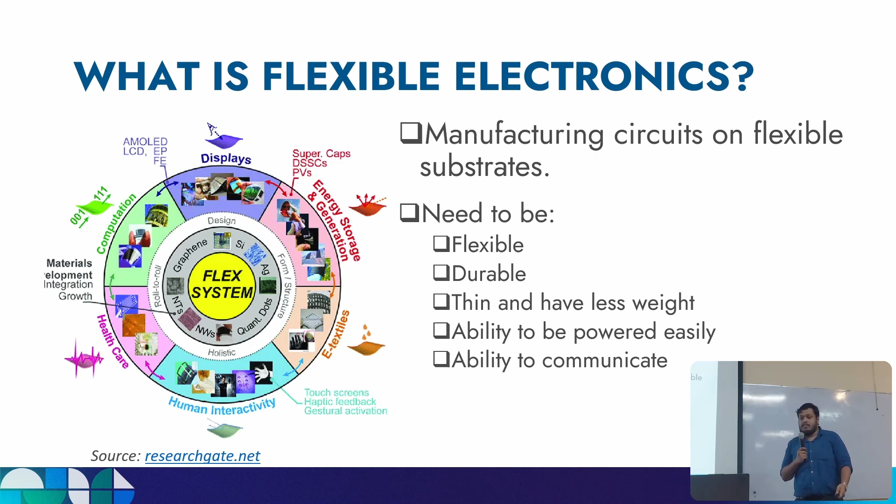But rather than that, they have to have this quality of adding little to no mass to the system. Another thing is the ability to be powered. That means if we are giving any voltages or currents to a flexible circuit, they have to be given in such a way that the circuit does not become too bulky. And also it has to be able to communicate with the users and the environment more efficiently and more easily.

Let's see how manufacturing of these flexible electronic circuits works. There are two main components of a flexible circuit, which are the substrate and the conductive material. The substrate is basically a flexible substrate, mainly created from some kind of polyester or polymer, some hydrocarbon or carbon structure. Polyester means just our day-to-day polyethylene terephthalate and polyimide. Those are the main substrates that we use in our laboratories. And also there are commercially available inks which are used to manufacture these flexible electronic circuits, and we can use technologies such as deposition and printing in order to connect the substrates and the inks together.

There are two main types of fabrication in flexible electronic circuits. One is deposition. Deposition has three main types. One being chemical deposition, which deposits the inks or the conductive material on the flexible substrates using electrolysis or some chemical reaction. And also there is physical deposition, where we use some kind of physical force or spray coating. We just deposit it physically. Spin coating uses the centripetal force to deposit the inks more uniformly, and doctor blading is another very famous method, and also spray coating.

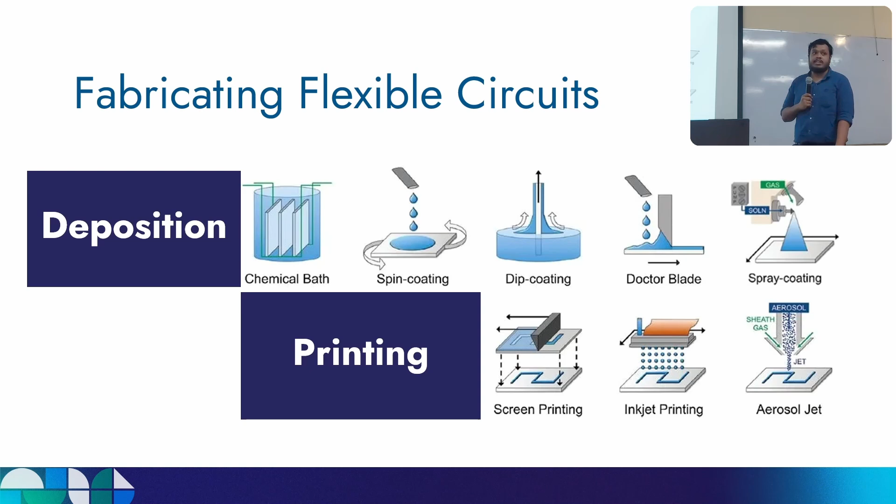After printing those electronic circuits, we have to do a process called sintering. What is sintering? Let's say those metallic inks that we use have organic solvents in them. Those organic solvents are not conductive, therefore they hinder the metal's ability to conduct electric signals. So we have to heat our samples, that means our circuits, locally or using some method below the melting point of the used nanoparticle inks, so that the metallic bonds become stronger. The nanoparticles fuse together, and also the solvents are evaporated. That results in better conductivity and better adhesion between the substrate and the nanoparticle ink.

And also, since the metal is connected together very well, there is less ability to be oxidized. If there are metal oxides, the ability to conduct electricity reduces, the same as if there are organic things. Also, the pores: since we are using nanoparticles, they are in an array like this when printed, so there are small pores between each particle in the neighborhood. When we heat the printed electronics, those pores are reduced because of the better adhesion. The pore reduction helps with reliability, because these pores cause mechanical breakdowns in circuits. We will look at that down the road. Yes, that is mainly my research.

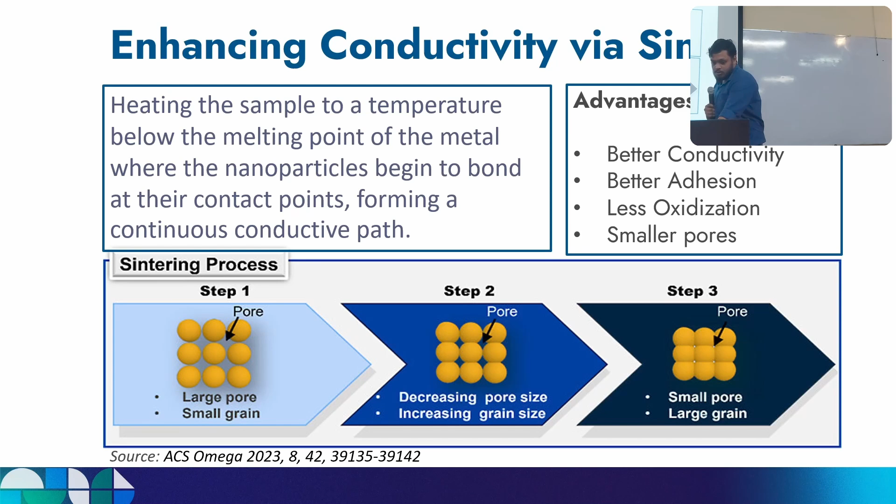There are lots of methods for sintering flexible electronic circuits. The most conventional method is thermal sintering, where we just use a conventional oven, put the substrates and the printed materials inside the oven, and keep the oven on for a few hours under constant temperature. But there are a few drawbacks, because the plastics or polymers that we use as substrates have much lower glass transition temperatures. That leads to deformation if we heat to much higher temperatures.

In order to overcome that drawback, scientists have found localized heating methods such as laser sintering, where we use a laser and focus it on the printed samples, and that causes localized heating, which results in the organic solvents being evaporated more quickly and more efficiently.

So that is a very popular method right now. And another one is electrical sintering, where we give an electrical pulse to a circuit from two ends and let the Joule heating take care of the heating element, and it will cause the solvents to be evaporated. Also, there are a lot of methods like photonic sintering, where we use intense light, and also plasma sintering.

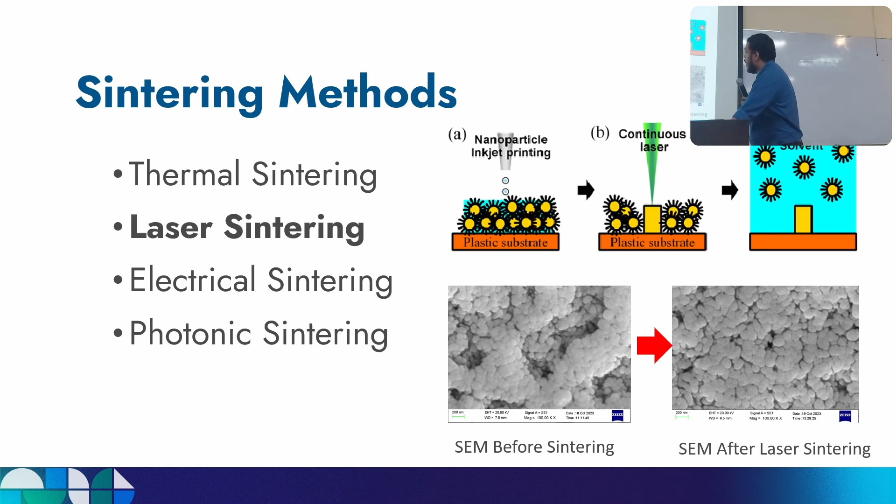And we can see that the bonding is even better. I don't know if it is clear, but the particle size is also a bit larger because of the greater bonding. So after this sintering process, we arrive at a circuit like this, right? So there are many printed parts of a flexible electronic circuit.

It can have maybe a small display. If you are familiar with organic LED or OLED displays, those can be printed. And energy harvesters, that means things like solar cells and antennas where we can gather signals, sensors, and also batteries and capacitors, transistors. In the current age, we can print them, but unfortunately, we still don't have ways to print high performance chips. So they have to be added externally using conductive adhesives.

So yeah. Also, another important thing I would like to point out is these lines. They go from major components to chips, and they connect everything together. Those are called interconnects. Those are the things that I was focusing on during my research, because they are rather thin and brittle. When a flexible electronic circuit goes through bending and complex forces, those are the things that break down first, because they are very brittle.

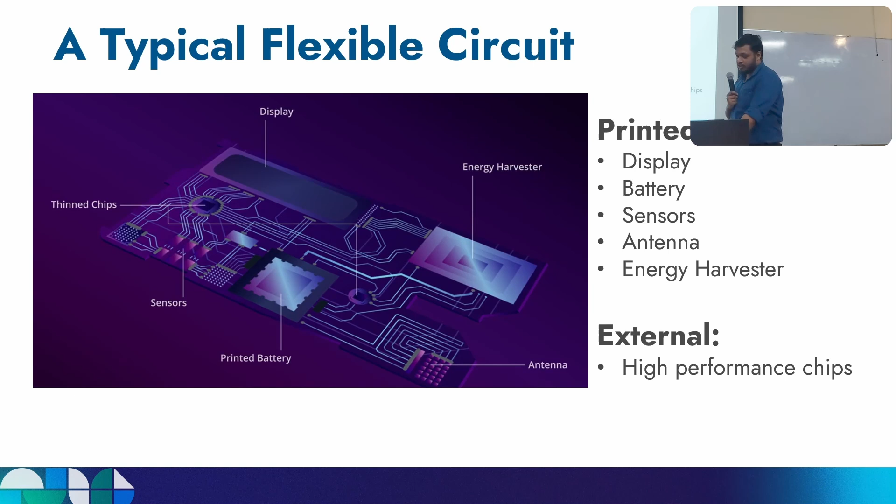So we have to be able to overcome that problem using some methods, right? So that was what I was focusing on. And those flexible circuits have lots of applications right now, and they will grow more in the future. Some of the examples are advanced medical devices which are together with our skin, and also sensors integrated inside our body which can monitor our health, and also smart clothing and e-skin, which is used even in soft robotics.

And also we already have mobile phones that are foldable, right? This is the technology that they are using to create flexible displays. And also we have applications in powering, such as improved solar cells and capacitors, and also sensors. There are numerous sensors; in our lab my colleagues used to develop gas sensors and salinity sensors. So there is lots of research to be done, and that brings us to the pros and cons of flexible electronics.

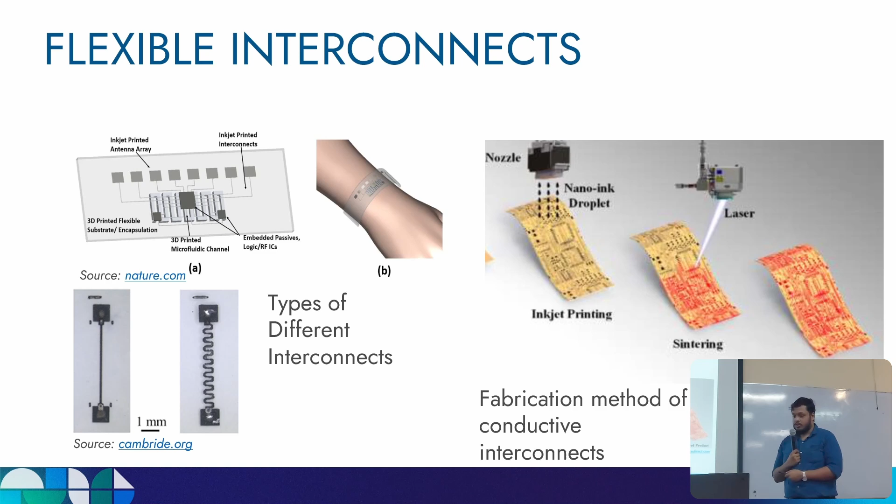As we discussed earlier. So in my research, I used the inkjet printing method to print my interconnects, and then used the laser and focused it on the interconnects to sinter them, and then used those samples for gathering data and drawing conclusions. Okay.

So, as I told you earlier, the interconnects go through very complex processes. It can be twisting and stretching and bending, and over time they go through these processes over and over, and it causes the interconnects to develop cracks on their surfaces. So that means the middle conductive trace cracks from the middle. And those start as very small cracks, micro tears we call them, and they develop further and further until it causes the interconnect to completely break up.

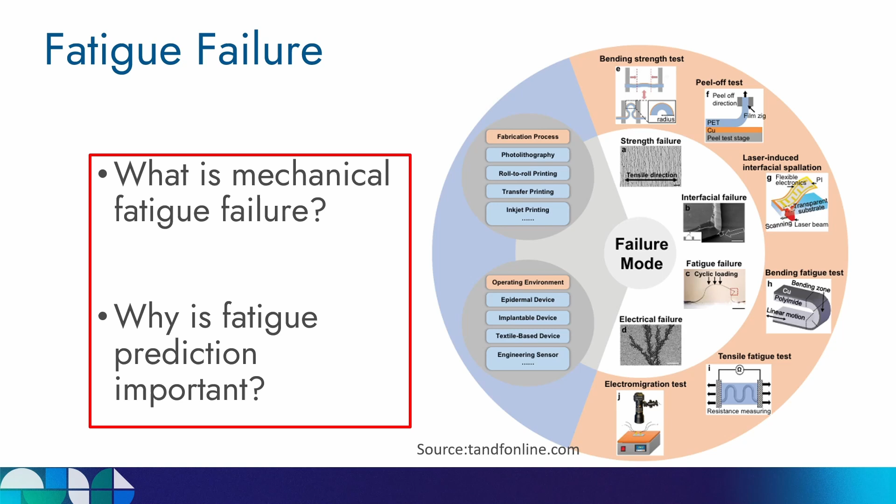So it is important to predict that fatigue or failure point, because if we know that point earlier, then we can take actions to replace or maybe modify and keep it from failing, right? So that was my objective in the research, where I used mainly lasers, and I had to fabricate those interconnects with predetermined, that means predicted, fatigue response.

To explain that a bit further, if we take an interconnect, we can manipulate its sintering parameters basically. So if we are using laser, then we can manipulate laser power, how fast it is sintered, and how many times it is sintered. Using those conditions, I wanted to show that the interconnects can be developed into having a predetermined lifetime. So let's say if we are talking about stretches, I wanted to manipulate those laser parameters and develop an interconnect which had, let's say, 1,000 stretches. So that is what we call fatigue life.

And by developing that method, I wanted to develop a method to monitor the health of interconnects. So it means the quality of interconnects in real time. So those were done using the effects that laser sintering parameters have on the fatigue life. So I had to analyze those.

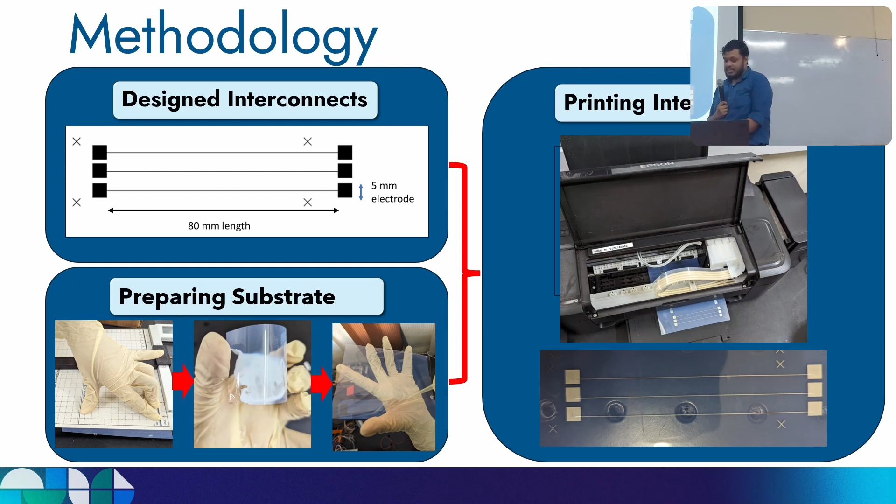So after printing, this was my sintering setup. Here is the laser, which was a Cobolt 0801 laser, and its wavelength was 785 nanometers. That means it is a near infrared or infrared laser, and it was guided through these mirrors and focused on my interconnects here using a convex lens.

So this is a closer look at those interconnects. You can see this is the laser. This here is a CNC machine which was used to scan the interconnect completely under the focused laser beam. This shows how I align my interconnects with the path of the laser, and the signals were given using Universal G-code Sender software to manipulate the CNC.

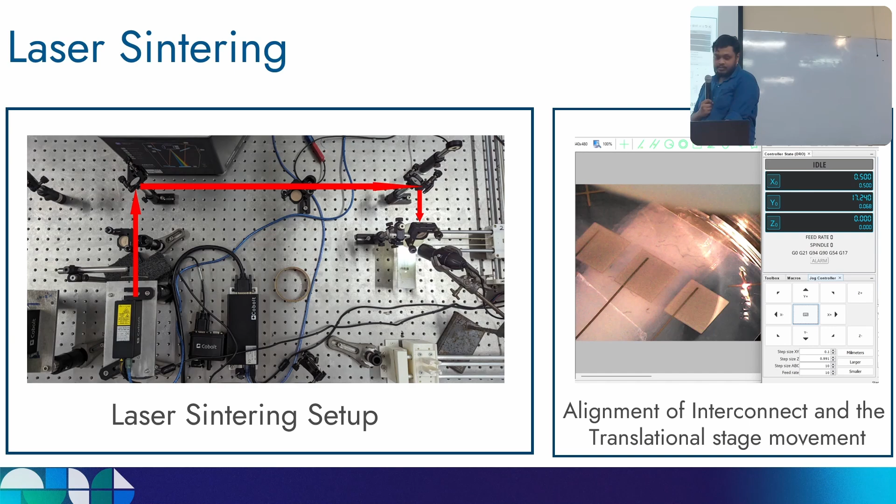And those data were analyzed using multiple methods, both experimental and computational. First, I did the electrical characterization using the collected resistance data from the digital multimeter and analyzed how the resistance changes, and the crack formation was analyzed using SEM images and digital microscope images. Also, some simulations were carried out to show whether the interconnect was completely sintered, and some statistical analysis was carried out to determine optimized laser parameters for sintering. We will discuss that in more detail.

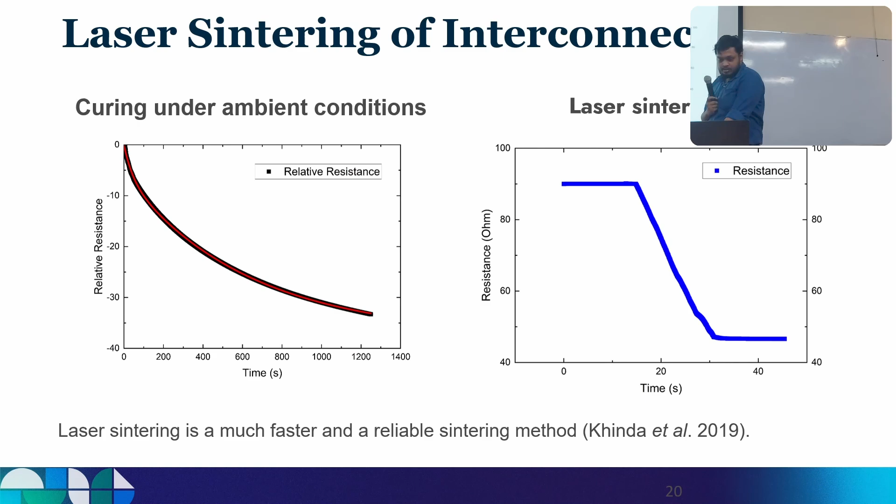So this is a closer look at the image that I showed you before. This is under 20,000 magnification, and you can clearly see the larger pores in the cured interconnect's electron microscope image compared to the laser sintered image. So we can determine that laser sintering is a good method of sintering.

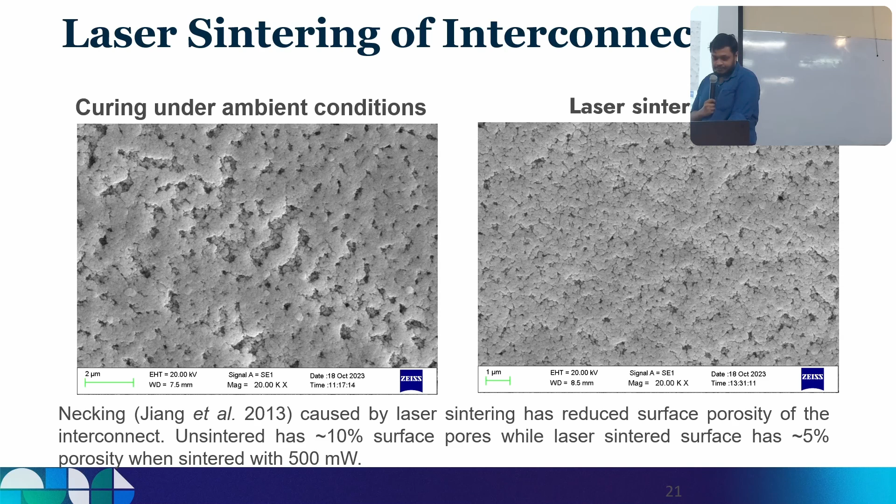Alright, so this is one sample of results. This is a single interconnect bent over about 700 cycles. In red is the maximum resistance during a single bending cycle. The bending cycle, as I explained, was the machine going up and down, and the maximum resistance occurs at the top because that is where the maximum bend and maximum stretch occur. The line in grey or black is where the resistance was recorded at the rest position, meaning the interconnect is at rest, no bending.

And the blue data points are the average resistance over a cycle. Average resistance means the complete data over a cycle was taken and the average resistance was calculated. We can see that it has a more linear trend compared to the red, which is the maximum resistance. It is more linear and has less noise, and it shows a more significant increase than the resistance at rest. So I selected this average relative resistance increase as my response to carry out my analysis.

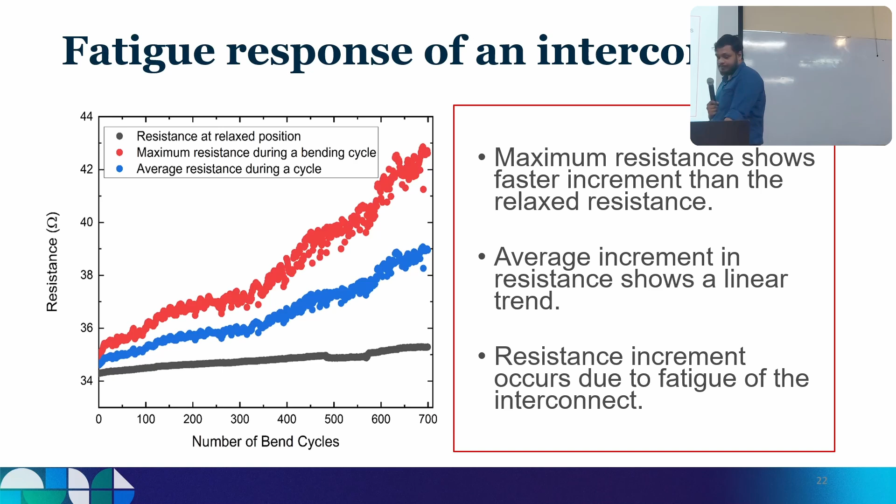And this shows how laser power affected the change in resistance. We can see that the lowest power, 350 milliwatts, resulted in the most stable interconnect. Fatigue life was defined as a 10% increase of resistance. Here you can see it is about 2.5% at 700 cycles, so the counted value for 10% was 3850. Other powers resulted in different lifetimes compared to the 350, but there is no correlation among those.

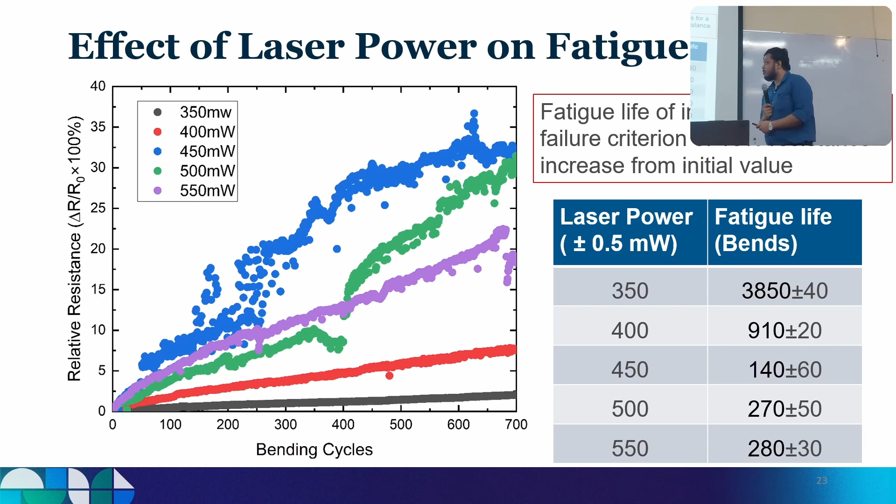So for my critical interconnect, as I mentioned earlier, I selected this 350 milliwatt power parameter, and then to select auxiliary interconnects, I had to do some more work. Moving on, these are the temperature simulation results, where I confirmed that the temperature increment is uniform for all the powers that I used.

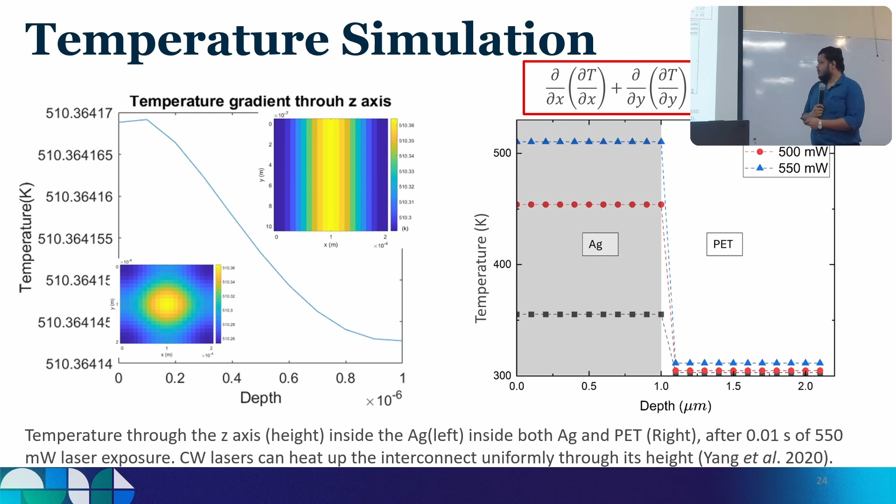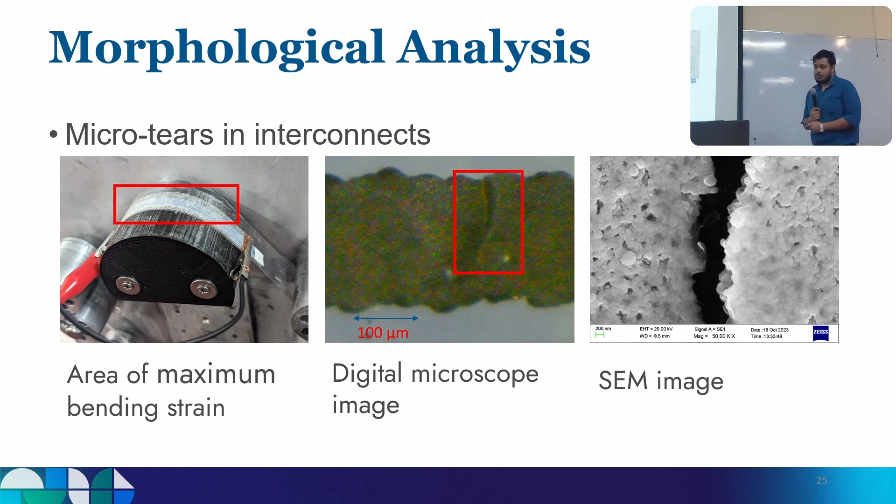This is the morphological analysis, where I took samples from interconnects and then analyzed them under the digital microscopes. And if you can see here, there is a very large crack almost through the interconnect, and here is a very small crack under 50,000 magnification. These are called microcracks because they are very small, and these are the ones that keep developing. So these are some more cracks that are caused by the bending. When these cracks form, we say that fatigue has been reached.

And then to find out the parameters to use for auxiliary interconnects, I had to use a process called design of experiments. Design of experiments is a statistical approach. If you are familiar with statistics, I think you have heard of this. But if you have not, it is basically like a linear equation, but for multiple variables. So I used laser power, scanning speed, and number of scans. And my result or response is the average relative resistance increment after 2500 bending cycles.

So what I wanted to do here was find an equation relating the ARR value with these parameters. So if we say A, B and C, we have to get a function F of A, B, C related to ARR. So we use combinations of these. We first select two levels, lower and upper. Since 350 was my critical interconnect and it showed very stable lifetime, 450 showed the least lifetime and 550 was the second highest, these two were chosen as the levels for laser power. Scanning speed was chosen as 5 millimeters per second and 15 millimeters per second, and the number of scans 1 and 10.

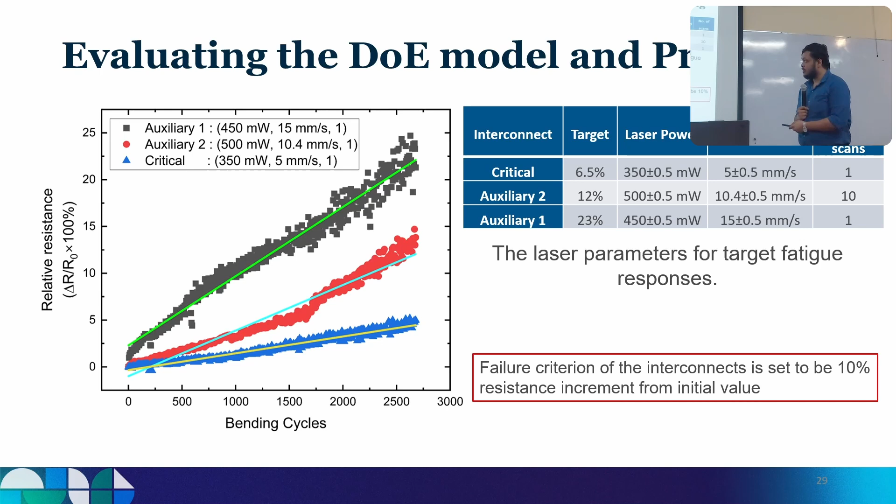And this is the result of those three resistances for those three parameter sets. You can see the green line is the auxiliary one, which has the most increment, and so on. So finally, this was my result. After real analysis, I achieved values almost inside the predicted values. For the critical, I predicted 6.5, but I achieved 4%. That's even better. And for the auxiliaries, I achieved very close increments of resistance.

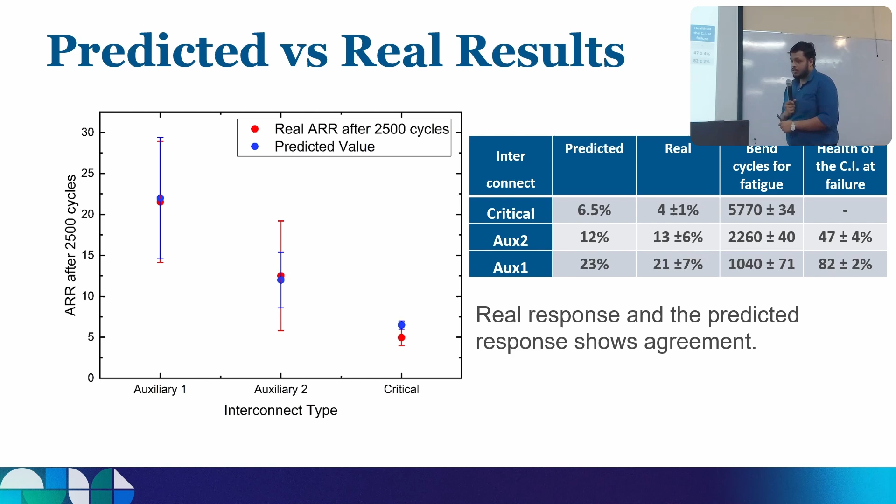So these are the fatigue lifetimes, and those can be used to gauge the health. Fatigue was, as usual, set to 10% resistance increment, and this was the number of bending cycles required to reach the 10% increment. So when these three were in the same environment and fatigue tested, once this auxiliary one fails, that means close to 1000 bends have been achieved, and the health of the critical interconnect is at 80%. When the second auxiliary fails, that means 2200 bends have been achieved, and the health of the critical interconnect is around 50%.

So that led me to conclude that this method can be used to gauge health in real time using parameters of laser sintering. But the interesting point here is we have to have the same conditions. If we are doing this in a different lab, the parameters might be different, because we can't predict whether the printing is always the same, which is a drawback.

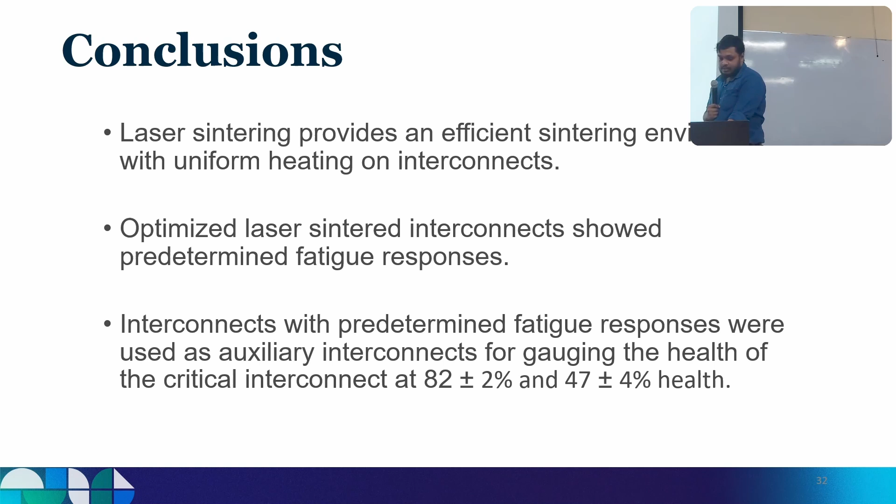So that is basically what I did. The first part of my research was published as an abstract in the American Physical Society virtual March meeting, and it was presented virtually.